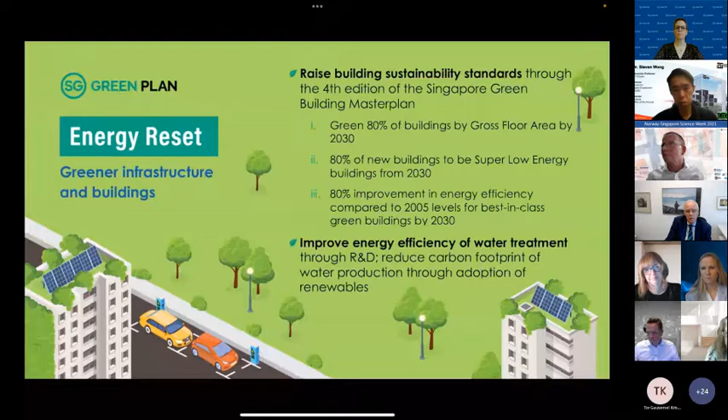From a buildings perspective, in terms of energy use, we want to raise the building sustainability standards. For example, we want to green 80% of our buildings by gross floor area by 2030. And of course, we're also looking at improving our energy efficiencies for even the basic things like water treatment.

Here, I mentioned about the reduction in energy consumption of existing towns. HDB stands for the Housing Development Board, essentially the agency responsible for the planning and development of public housing in Singapore. So we'll want to reduce the energy consumption and look at developing a small part of the western side of Singapore in the Jurong Lake district as a model sustainable mixed-use district. This district is about the size of about 500 hectares.

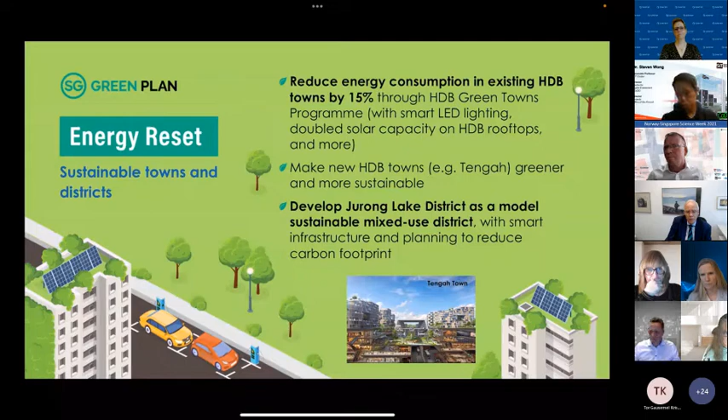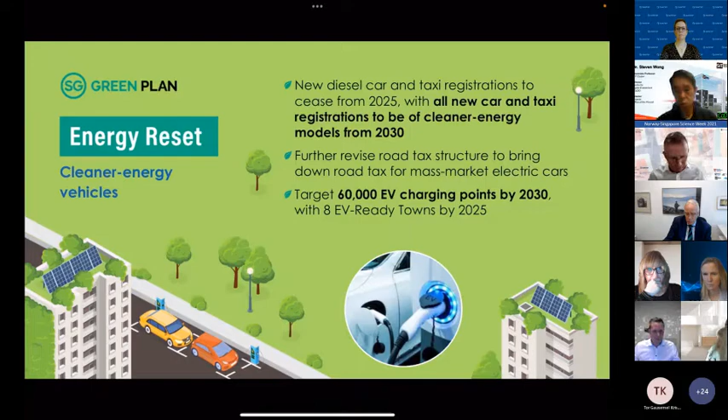And in terms of energy from a vehicle perspective, we would want to have all new car and taxi registrations be of cleaner energy models by 2030. And we are in the process of installing about 60,000 EV charging points in Singapore.

The second pillar is about sustainable living. Here we are looking at really encouraging water conservation and water efficiency practices, both in households and industries. And we have a national strategy to address e-waste, packaging waste, as well as food waste.

In encouraging our citizens, rather than take personal transport, to shift towards greater adoption of public transport, we will be expanding our rail networks by about 50% by 2030. We will be using cleaner energy public buses. And of course, we will also be developing facilities that encourage walking and cycling across the island.

And we recognize that it is important to teach our young and make them aware of the sustainability challenges as well as what they can do as individual citizens. So as part of the plan, we'll build much stronger awareness of environmental aspects into all our school syllabus.

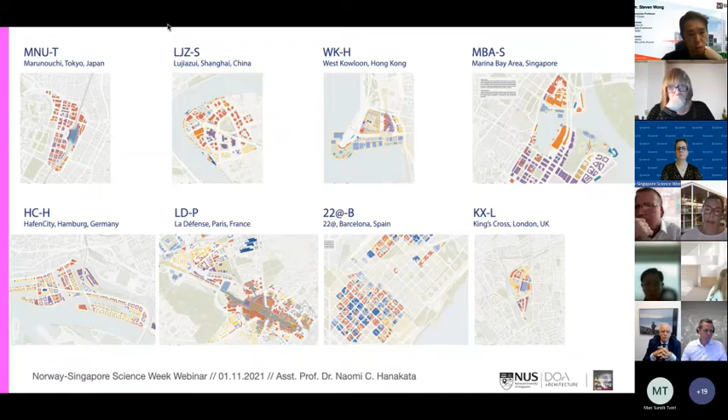And then some projects in Europe: HafenCity in Hamburg, Germany. Maybe some of you know - I'm sure Paris La Défense is familiar to most of you - but also 22@ in Barcelona and King's Cross in London. All of them have, as I mentioned earlier, very mixed programs.

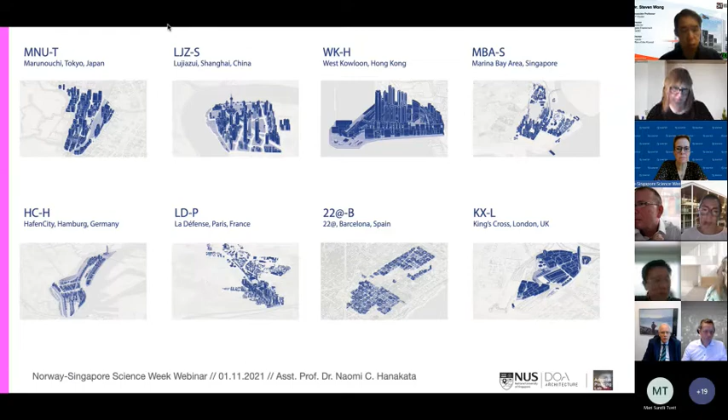But what you can see here also in the satellite images is that they usually form very distinctively different urban patterns, distinctively different to the surrounding established urban fabric of the city in which they're embedded. That comes with a lot of problems, including the creation of new inter-urban borders that need to be considered in the planning process. And you can see here they also have very distinct architectural elements.

What I want to highlight here are two different approaches we can see in the development of such projects. One, plotted in this straight line, is usually the attempt to fix everything in the early conception, particularly the design stage, regarding implementation, operation, and process. So the moment of design usually determines exactly the future of the project, even though these projects, as you saw on the timeline, usually take 20, 30, 40, if not 50 years to develop. Everything is being determined, particularly when it comes to spatial and programmatic functions.

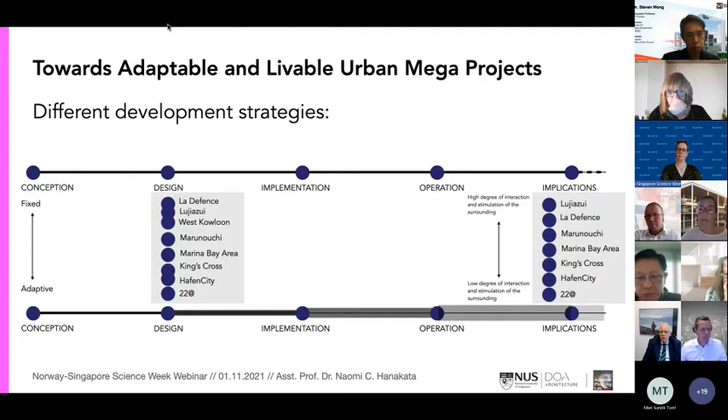22@ in Barcelona is an example of an extremely open, flexible, and adaptive planning scheme, which entailed no 2D master plan from the beginning whatsoever, but much more of a regulatory process that each development proposal had to go through and get approved by multiple councils, including dedicated councils for the 22@ project, but also within the city of Barcelona, leading to an extremely high variety of spaces, program combinations, and atmospheres and qualities within the area.

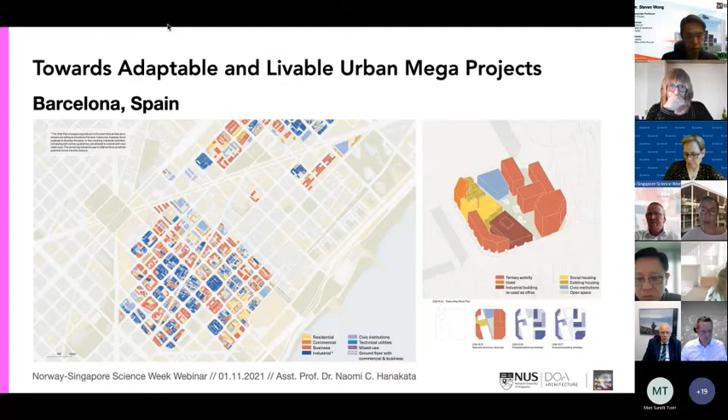Another project with a slightly different but also very interesting open approach is HafenCity Hamburg in Germany—maybe some of you know it. It's the site with the Elbphilharmonie, between the old city center and the port of Hamburg. The project was started in 2000 and is targeted for completion by 2030, so over 30 years.

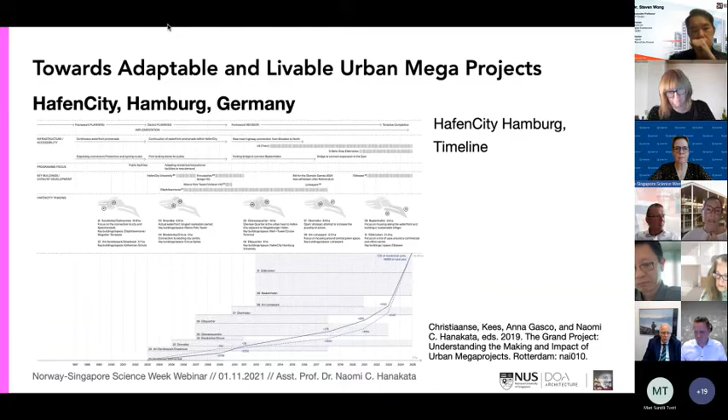While there was a plan at the very beginning, a master plan, it never really attempted to determine exactly what was going to happen in 2020 or 2025, but designated areas instead. You can see here in the plan 10 areas that would be developed subsequently, and the master plan at the very beginning only outlined very basic infrastructure functions, as well as qualitative functions within the districts, that would then be further specified in smaller design competitions much closer—2 or 3 years—prior to the development of the area.

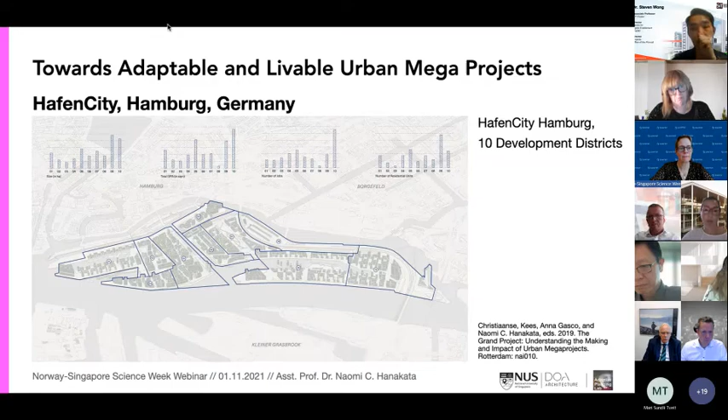If we're trying to move towards more adaptable and livable urban mega projects, I think key planning parameters include working with spatial qualities—so it's not so key to determine physical aspects of a project, but rather to determine spatial and programmatic qualities. Work with open spaces from the very beginning, so that even within areas that might only start development in 10 or 20 years, open spaces are made accessible and continuous throughout the site, connecting to the existing urban fabric—I believe this is key.

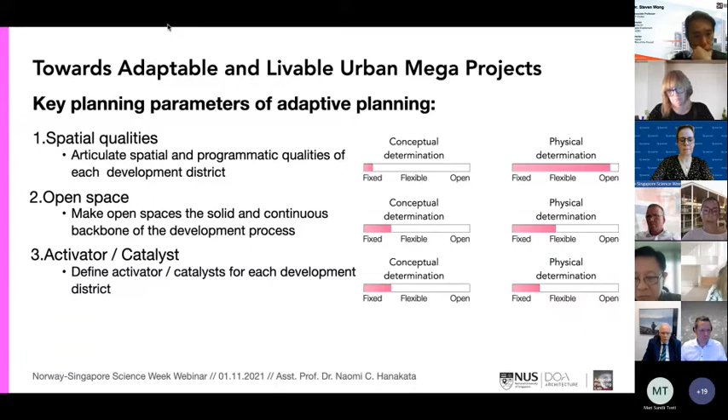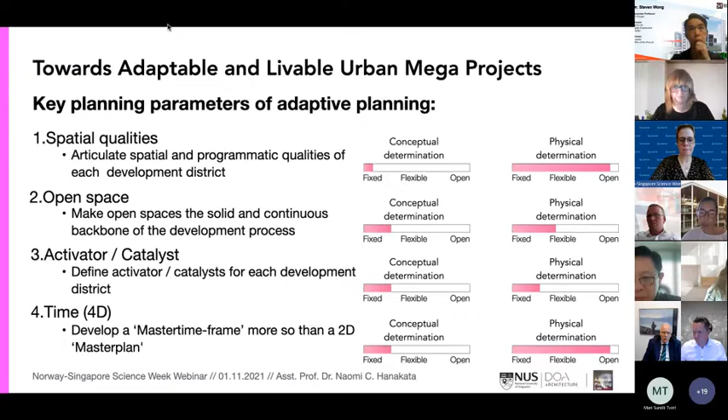Working with activators, or catalysts as I also call them, and determining those at the very beginning for the entire development is critical. And then really thinking of a master plan not so much as a 2D scheme, but as a 4-dimensional tool that has to be conceived as a continuously dynamic way to present and project what is going to happen within a project.

Again, the reason why I think it's important to look at these projects in the context of sustainable and livable, or happy urban environments, is key because of their size. They usually form an extremely important new centrality within cities, as you could also see from the case studies and references I quickly fleshed out.

But it's also extremely important to consider that because of their size and cohesiveness, meaning they're planned by one authority, carried out and managed by one authority, they very easily create new borders within a city. And with that, because of that cohesiveness, they also have the potential to in many ways become model projects.

We know that the Marina Bay area, in many cases, has served as a reference, an aspiration for other cities to develop a similar project. So this is always something we have to be very much aware of. And if successful, they always have the potential to function as a catalyst themselves for future development in the city.

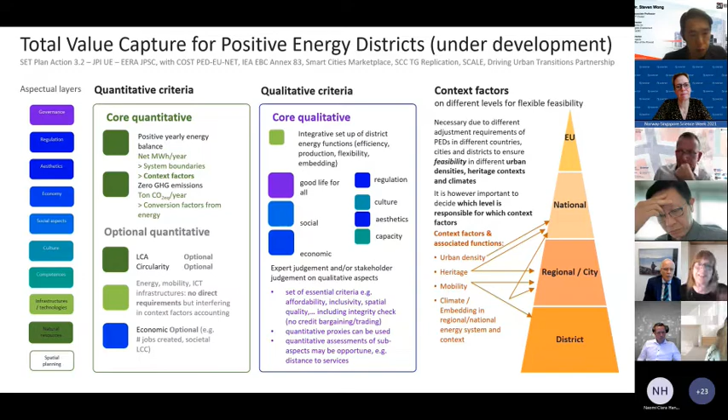So this is what we are going to work on quite intensively now for at least 4 years more, and probably more than that. And ideally then not just in Europe, but also together with you. I'll just give a few examples of some of the things we're doing in one of our lighthouse projects, Positive City Exchange. First, just a quick recap.

I already mentioned this. What often happens is, even if you say that you're going to look at everything together, very often the physical things, the energy, the transport, is what gets taken first, and everything else that we said was important, the senses, the well-being, the values, gets pushed aside for later. But in practice, if you can reach people through values and through this well-being, then you will get people on board to do the physical things. So we shouldn't divide them.

We should also make sure that all of these intentions don't just get mentioned in a nice program or a strategy, but that they get taken on in the whole process of the development. Because what often happens is there's a very high ambition in the beginning, and then when resources and capacity start to dwindle, they disappear, and you get only the technical one. So we want to make sure it gets included in the whole process.

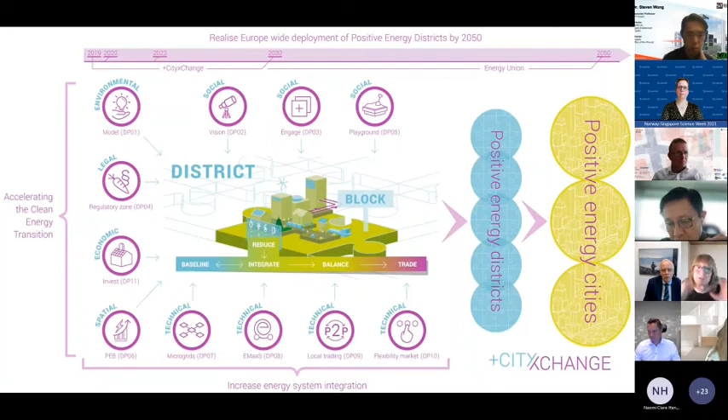So a few examples from Positive City Exchange, where we work with 7 European cities, 23 industry partners, and 2 universities, including NTNU, which is leading this project. Again, we wanted to do this integrated approach, everything together.

Of course, it also means that, as regulations were already mentioned before, very often we have to test something, for example in terms of sector coupling between thermal and electric, like vehicle-to-grid chargers, battery storage, selling and buying energy from each other. Very often that is not allowed, for example in Norway, but also in the rest of Europe.

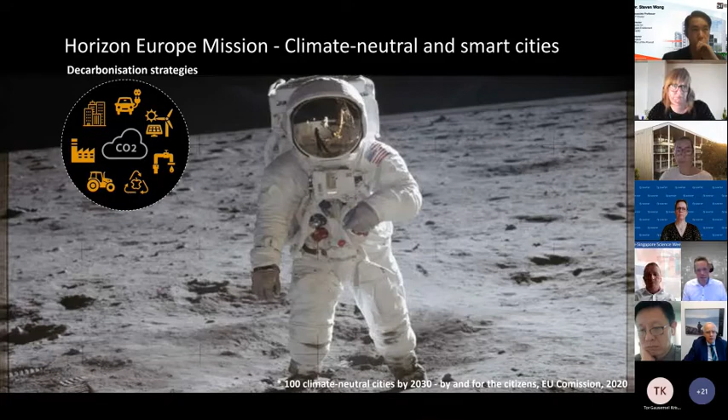We are focusing on Horizon Europe in this program and a new mission, climate neutral and smart cities. I've just picked 4 areas that we are now really targeting. The first one is decarbonization strategies, looking into energy efficient buildings, mobility, renewables, water supply, and so on.

The other one is quality of life, and here you have all the citizen focus—citizen engagement, sharing economy, transparency in processes, digital exclusion problems, new jobs, privacy, and new citizen services.

Then we are really emphasizing the digital infrastructure and data sovereignty as part of aligning with the European digital single market. We are really now trying to get the municipality, the citizens, and the companies engaged in viewing data as an asset.

So being able to have consent services for using the data, fair value creation from data, creating this data reservoir I was mentioning—I will give a very short introduction to that—and using reference architectures developed in the European Union like GaiaX and international data spaces as part of this.

The fourth area is resilience, and of course we need to pay attention to resilience for the electricity supply, the water supply, the environment around the city, the citizens, the built environment, and of course the digital infrastructure. So this is our focus related to the European Union on smart cities.

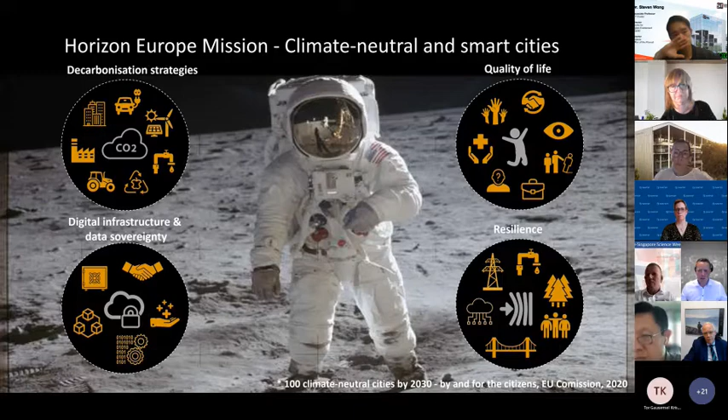So a little bit about data-driven innovation. What we see now is a lot of different areas for innovating using data, and this is just some of them that we are involved in Halden. We need to have some kind of holistic view on all of this, and today the biggest problem is that most of the data are stored in silos and we are not able to share them and drive this innovation.

So what we're working on right now is to establish this layer of data governance to make sure that we have the procedures, laws, and regulations related to data sharing, and promote data-driven innovation. We are working on a pre-project now for setting up a data governance model for the city—hopefully we'll pilot this next year. The other project we're working on is a smart inventory of digital resources in the city so that we are able to get an overview of all these resources.

And it's more than data, it's algorithms, it's visualizations, it's systems. So this is 2 of the projects. And I think also in the long term, we are trying to establish this city plan for data so that we can plan and engage the citizen and the politicians in this kind of approach.

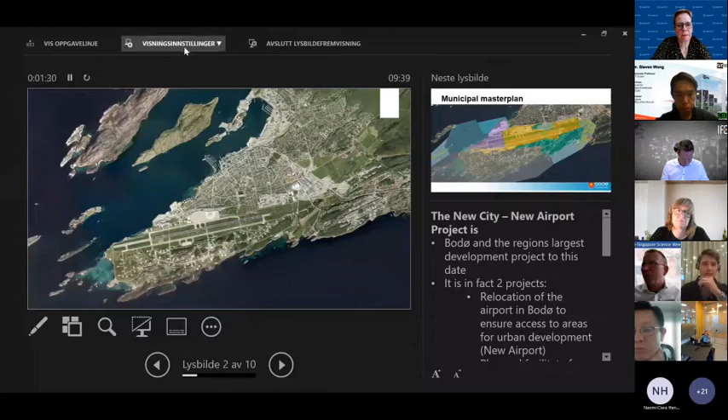Kristoffer, we don't see your presentation in the presentation mode. Oh, okay, sorry. If you could just flip it over. Yeah, yeah. Is it better now? We still see your next slide as well. All right, okay, sorry about that, I'll try sharing with you again. Just a minute.

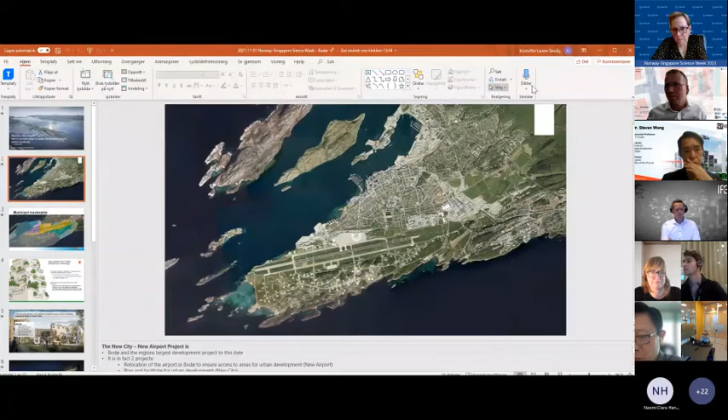Is it better now? If you can just go to the top, there's one that you can switch your displays. Yes, correct. Just change. That should bring it, I hope. Oh, okay. Yours does not. So I tried it again. Sorry, I don't know why it's different. Should we just continue maybe, if everybody is fine with this? I'm sorry, I don't know what's happening. I try one more time, so it's important that you can see the whole picture.

Actually, could I suggest? Yeah, that would be good. Sometimes it's a problem when you connect a screen. You project first, then before you share, you choose the PowerPoint presentation, full screen. Yes, better now. Good, thank you. Sorry about that.

So this is the Bodø regional largest development project to this date, maybe in Norway. It's in fact two projects: relocation of the airport in Bodø to ensure access to areas of urban development, and to plan and facilitate for urban development. It's also a large, important transport and communication project which will give the region access to a state-of-the-art, modern and efficient new airport.

But it's first and foremost an urban development project for the city and the region, so the climate, energy and environmental ambitions are high. We aim for this to be a lighthouse project of national and international significance, and also a model for how we should plan and develop cities for the future in Norway.

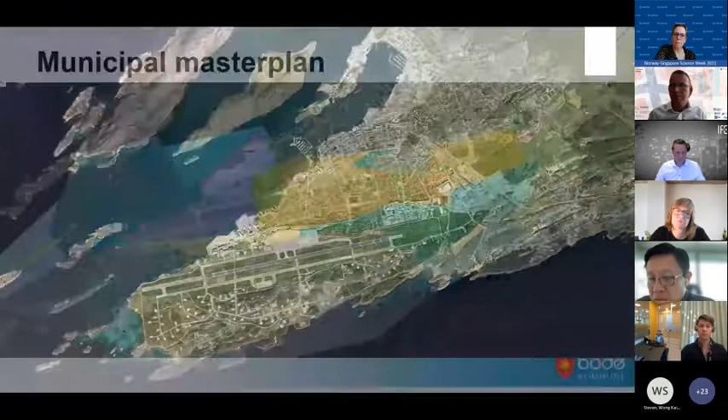So you can see a short overview of our municipal master plan, which we are working on now, and you can see how we suggest developing the area. You can see the orange and purple areas where the new urban areas will be developed. You can also see the green areas, and also suggested new harbor areas in the west.

The urban area will fulfill very high climate and energy ambitions so that we can take steps into a low emission society. The municipality's ambition through the project is that the first neighborhood in the new area will be planned and developed as a zero emission neighborhood, and be a leader in how we can build the low emission society for the future. The new district area will be further developed in line with the UN's sustainability goals, the Paris Agreement, and national as well as municipal goals within climate, energy, biodiversity, as well as circular business models, which shall all be used as a basis.

We also worked out an environmental program for this new urban area, to clarify all ambitions and objectives within climate and environmental issues in all stages of development. It's also based on goals and guidelines for the municipal master plan for the new urban area. The main themes here are energy, circularity, waste, material use, mass management, biodiversity, and climate adaptation. We also worked out goals and measures for each theme. This has also been linked to the regulations in the municipal master plan, and further requirements are set for a separate environmental program for each zoning plan in this urban area.

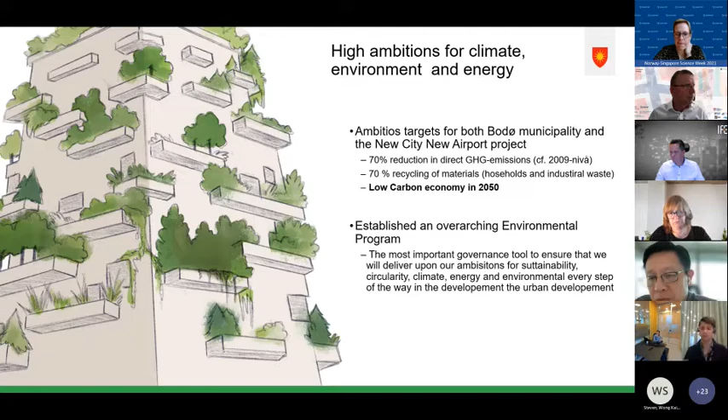I mentioned this shortly last year: Bodø municipality is a partner and pilot city in the research center on zero emission neighborhoods. The main objective of this research center is to develop competitive products and solutions that will lead to the realization of sustainable neighborhoods. These neighborhoods shall all have zero emissions of greenhouse gases linked to their production, operation, and transformation, including the production and transport of materials, for instance. This requires a very high degree of technological innovation.

We work closely together with the researchers in the center, as well as public and industry partners. We are one of nine pilot cities spread all over Norway. Our ambition is that the first development in the new urban area will be planned and developed as a zero-emission neighborhood, as I mentioned, and we focus on what the zero-emission neighborhood implies for urban planning and our planning procedures, as well as the construction of buildings and areas, so that these are not merely sustainable, but also facilitate high quality of life.

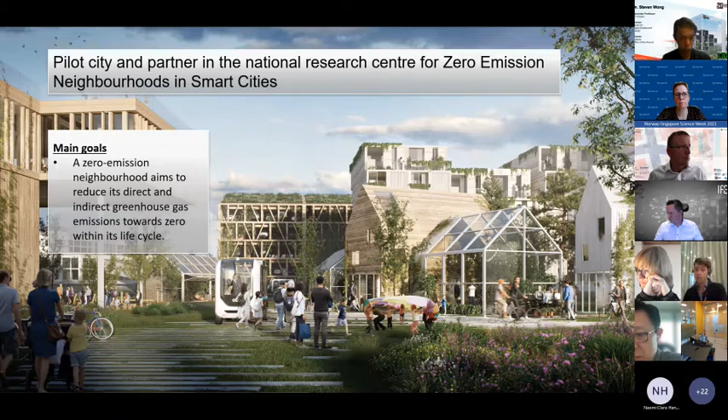We have also targeted efforts directed towards emissions-free construction sites. This goes far beyond energy efficiency. It's about planning and development with the area perspective at the core, and it's important to have early planning and a holistic approach to the building stock, construction sites, energy, ICT, mobility systems, and mobility as a service, with a focus on the people that will work in these areas. As a pilot city in the Zero Emission Neighborhood project, we have a particular focus on how to develop energy systems for the future; security of supply and a flexible, environmentally friendly energy supply is at the core.

A low carbon society requires that our buildings, mobility systems and energy systems are integrated. We want, through the planning, to facilitate new renewable energy production at local level, energy storage, and the sharing of energy within an area, optimal use of thermal and electric energy. This way we will be able to use our energy resources more efficiently.

This is important because there is currently a strong drive for electrification of all sectors of the economy, in particular mobility and industry. So learning, knowledge and competence building are absolutely central to succeeding in this transition into a low emission society and a circular economy, and to realize our climate, energy and environmental ambitions.

Here are some examples of how we work in different areas. As I mentioned, the municipal master plan for the new urban areas is closely connected to the ZEN project. We have also carried out energy system analysis in a development area in an existing city. We use the municipality's own projects to study future-oriented energy systems, and we see that good projects and studies lead to new projects. We also have, for instance, this Flexinord project, which is a very exciting project about new green business models, and we use the policy instruments actively to carry out the project.

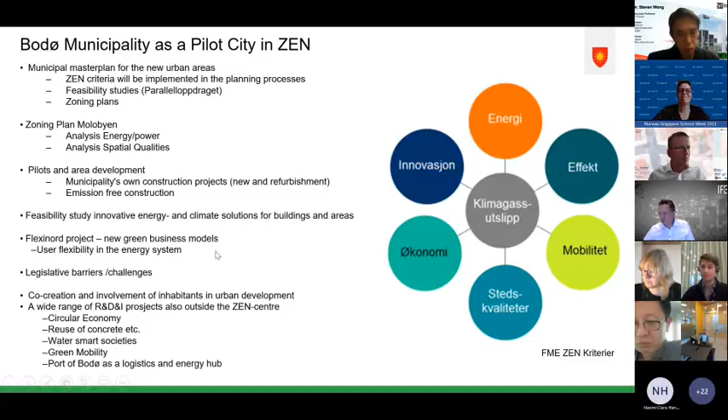Good morning or good afternoon, depending on where you're located. From Bodø, I'm here in the City Hall, and I'm thankful for the opportunity to speak to you today. My name is Gausemel Kristensen, and I'm a project manager here in the municipality of Bodø.

Most of my time I use on a project called City Loops, which is a Horizon 2020 funded project located in 7 different cities in the EU. We have different projects, but we have the same goal: to use technology and innovation for sustainability and circularity. It's divided into 3 phases: the R&D phase, the demonstration phase, and the replication phase.

And the project at which we want to live out this research and demonstration, these tools that we're making in this project, is the New City, New Airport project that Kristoffer was talking about.

Many of the things that we do are actually comparable to the things that IFE with Petter is doing, so I would love to hear more about that sometime. Petter, maybe we should team up sometime.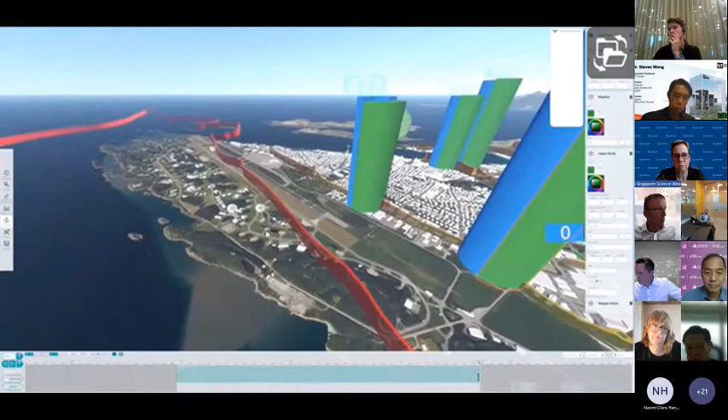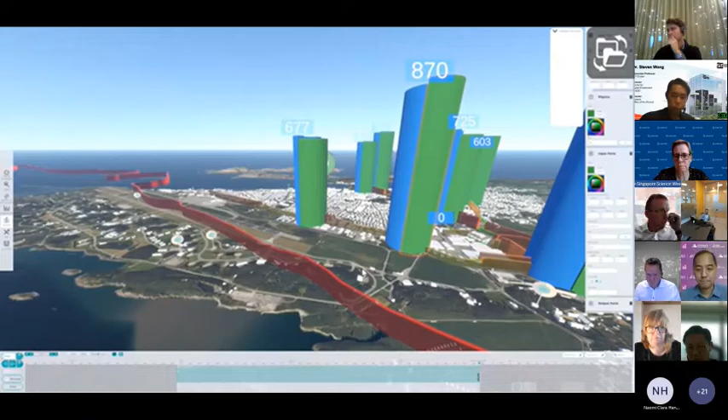There's hundreds of thousands of masses and materials lying at this area. So we want to use this tool to simulate how much traffic and correlating pollution it will lead to if these masses were to be treated in an unbeneficial way, for example if transported long distances instead of reusing them where they are.

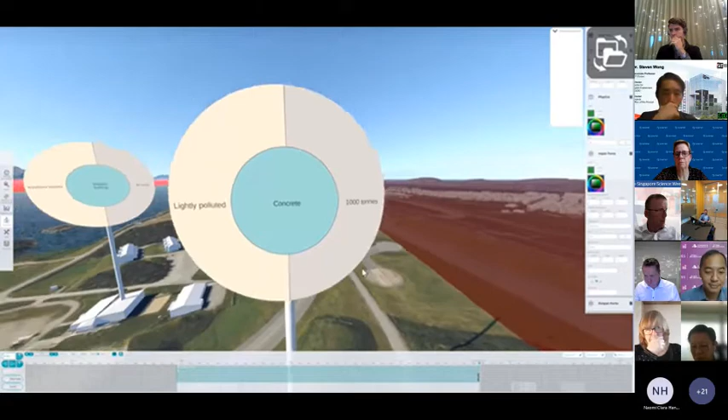Furthermore, we're using this digital twin of Bodø to identify the resources lying here. For example, here we have a hangar, and we know it's built of concrete, that it might be lightly polluted, and we have an understanding of how much it weighs. We're trying to identify everything that lies here, and we've done such analysis.

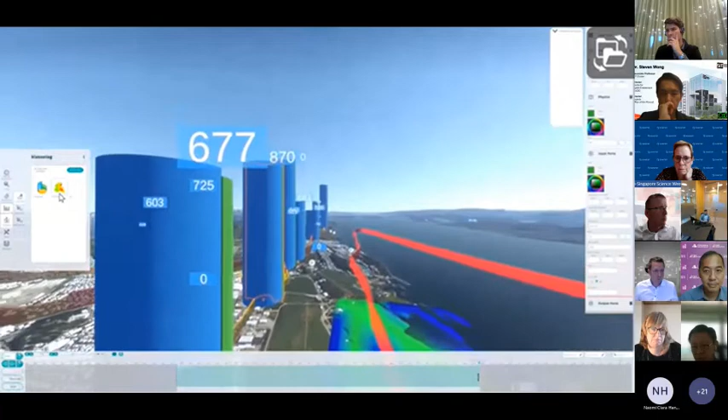If we can just look at this, for example—this is a heat map that indicates the quality and pollution of the masses there. I don't think I have time to go through every data set we're populating this digital twin with, but in general we're looking into how different values in a city correlate to each other.

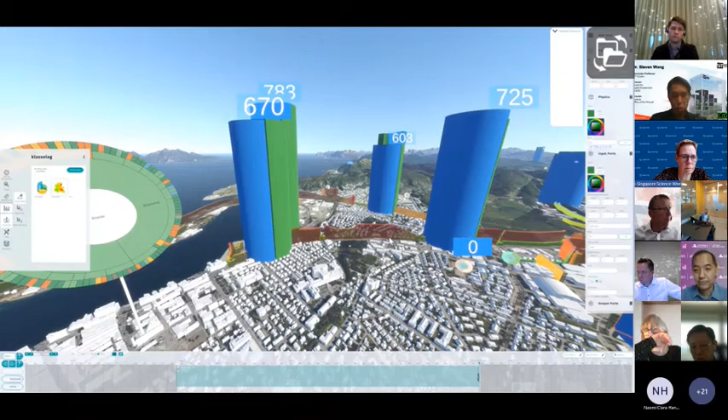We're getting knowledge about that. We're identifying traffic patterns—you can see, for example, these lines representing the intensity of traffic in the different roads in the city. Maybe we can see if there are actions we can take to reduce the intensity of traffic, for example.

For example, in emergency planning, we can see if there's waste transport happening at the same time as a typical rush hour. Maybe we can try to move the waste transports to ease the intensity.

I don't think I have many minutes left, so I'll round up by showing you this wheel. This is a data set we've gathered in order to call ourselves a United for Smart Sustainable City, due to UN's demands on the data we have to report to them. We're comparing Bodø's sustainability values—over 100 KPIs—to UN's standard, and the color codes show how well we're performing on different fields.

So we can look into environment, for example, and see that most of it is actually green. We can see that water, for example, is orange, and that's not because the quality of the water is bad, but because we are consuming too much water. In comparison to UN's ideal, we're not doing great on water consumption.

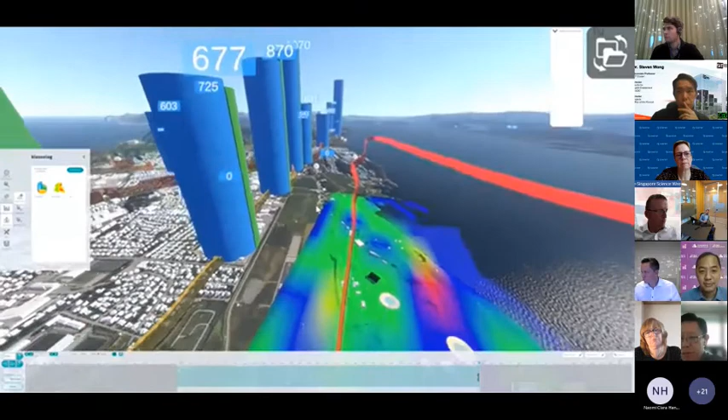I would love to tell you more about this—how we have sensors that pick up air quality, how that correlates with life quality, and how we are populating this map with socioeconomic data to see if there's any correlation between circular economy and quality of life, for example.

Thank you very much, Tor. Kristoffer, I guess that was the end of your presentation together. Yeah, very interesting to hear about Bodø, and I think it's interesting how visualization makes challenges much more visible for us and makes us more interested in the challenges ahead. And this was a good connection to our next presentation—Mr. Ho Chi Kit, Senior Director in C&W Services, who will talk to us about digital twins as well.

Good morning, everyone in Norway, and good afternoon to the audience in Singapore. My discussion topic today is on using digital twins to support asset management decisions in a built environment that will benefit the circular economy. My name is Chi Kit, I am a Senior Director in Cushman & Wakefield, a global real estate consultancy firm, and concurrently I'm also a first-year Doctor of Engineering student at Singapore Institute of Technology, SIT.

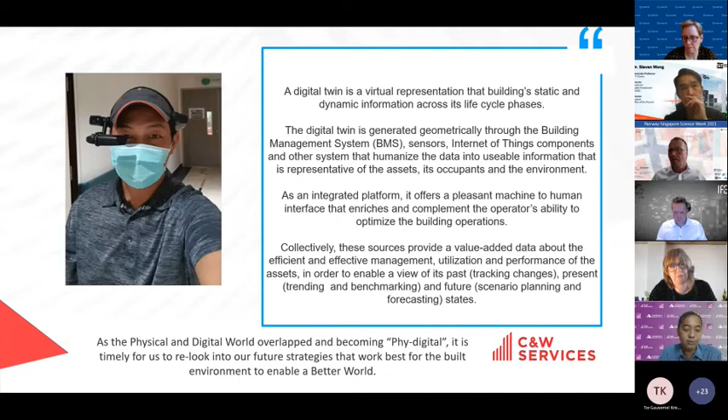In this picture, we have a smart glass worn by one of our engineers to provide remote technical advice to our field inspectors from a centralized command center. As the physical and digital world overlap and become what we call phy-digital, it's very timely for us to relook into our future strategies that will work best for the built environment to enable a better world.

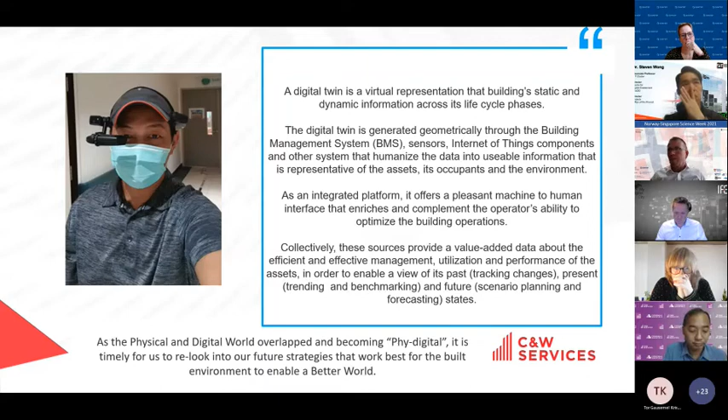SIT, which stands for the Singapore Institute of Technology, is located in Punggol Digital District. SIT is also commonly known as the Punggol campus. It's envisioned as a living lab where innovations in multi-energy systems, cybersecurity, smart living, and asset management strategies will be pioneered. Partnership and human talents really power innovations at the Punggol Smart District.

In the future, the district manager has access to the bright minds and technologies at the universities, as well as the industrial and corporate partners sited within this smart district. This generally hopes to achieve and foster better integration between industry, academia, as well as operators.

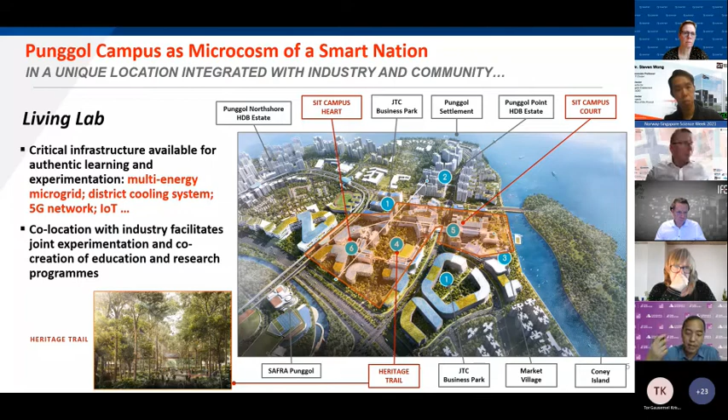Connectivity and community are key to a smart city. An open digital platform integrates various smart technologies such as facility management, security, and autonomous goods delivery systems, whereby it could optimize energy and resource efficiency in the district.

One important factor is that data is consolidated in the digital twin. This allows companies and corporates to experiment and test-bed solutions in a safe and secure environment.

As Dr. Steven has mentioned, if there's a failure, students will just be happy with a couple of hours of no lessons. But if it's in actual industry, we could be facing numerous lawsuits and heavy financial penalties. So a digital twin also has the repository of all the historical data.

This historical data can be used to train the AI model to predict and forecast future scenarios that could enable smarter decisions. This enables us to have a thinking facility for the future.

Mobility devices will also boost the building operators' effectiveness through augmented reality. So let's dive deeper into some examples of digital twin.

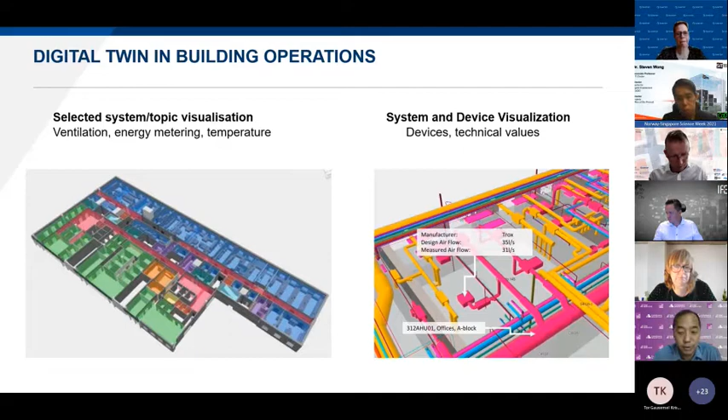Mobility devices can also boost the building operators' effectiveness through augmented reality. Technology is great, but it does not replace the foot on the ground to observe and identify delicate changes in the environment.

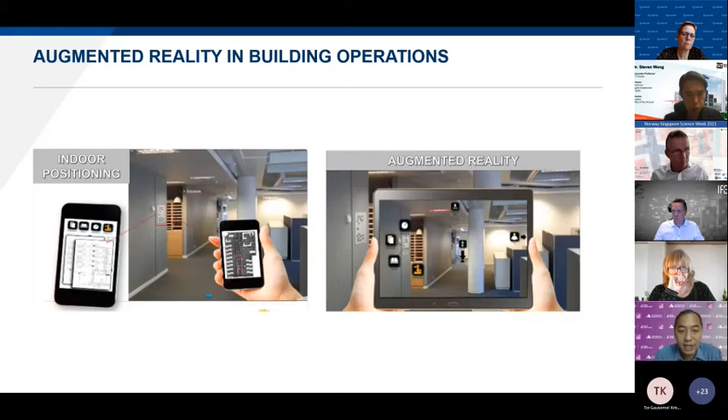Upon identifying an issue, an engineer can use his mobile device to carry out a quick investigation and diagnostic on the go immediately. So it's obvious that we need to be cleverer in building a smart ecosystem that benefits the operators, the designers, as well as the stakeholders residing within the building.

Let's take a physical asset, in this case a building, using a BIM model as a base to develop a virtual model. Through this two-way exchange of data in real time between the physical and the virtual model, we have a digital twin that's reflective of the real world environment.

The digital twin comes to life when human processes are seamlessly integrated. The plan-do-check-action cycle, be it through human or through an AI algorithm, is relevant today and also in the future. Through this life cycle of the building, assets are tracked, similar in concept to blockchains, where this information can be tagged to the asset over its entire life cycle.

In the BIM phase is how these materials, equipment, and devices influence future building performance and life cycle costs. So all this information advises both the architects and the engineers on equipment life cycle performance that will influence future buildings. And then the digital twin facilitates the actual operation documentation of the asset as well.

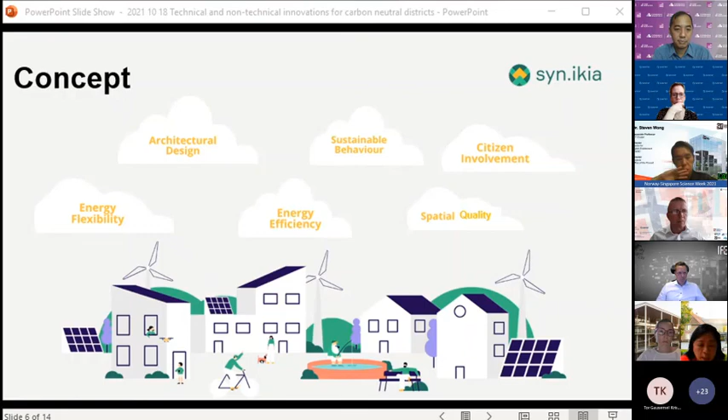In addition to having a heart of high-level energy efficiency, high share of renewable energy resources, and cost-effective energy flexibility, syn.ikia will also focus on architectural design and spatial quality, as well as the social aspects of occupant sustainable behavior and citizen involvement, all encapsulated in the concept of SPEN, Sustainable Plus Energy Neighborhood. One of the specific goals of syn.ikia is to increase the...